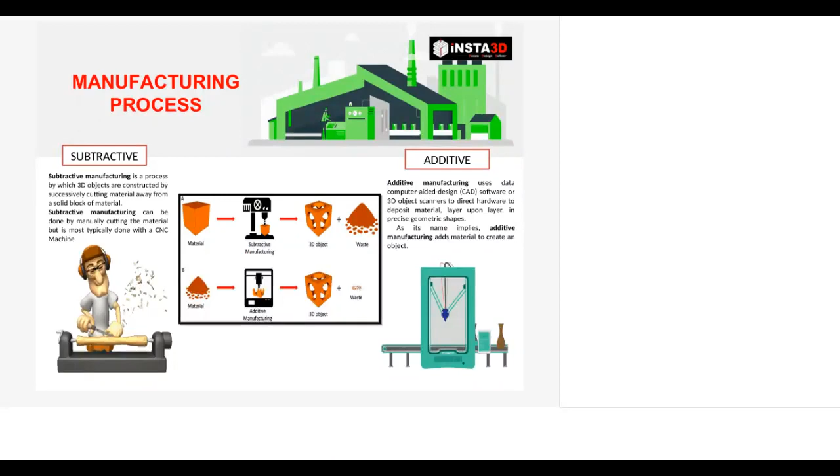So can you go to the next slide, Joseph? I have completed all this. Next.

11% of manufacturers believe 3D printing is ready to produce end-use products, meaning functional products. Most agree that 3D printing represents a more sustainable concept than conventional processes. Additive manufacturing uses raw materials which are biocompatible and biodegradable. So it is very sustainable to nature as well as in its processing technologies.

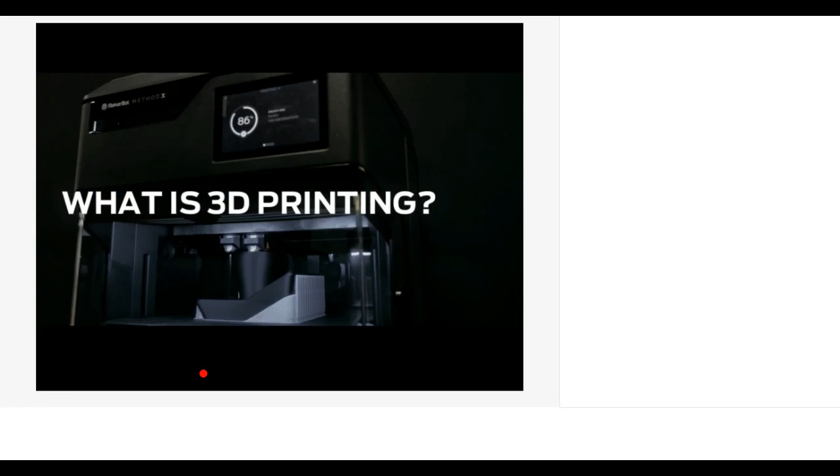So as you all know, what is 3D printing? It is like... next slide. Next slide. Next.

This is actually the process involved in 3D printing technology, additive manufacturing. Any technology can classify 3D printing into different categories based on its processing technology, but the process flow is same for all. You will be having an idea - the first stage of the 3D printing process is ideation, or creating an idea.

Next, you have to take that problem into a conceptual design or a model. For that, you can use CAD modeling software, or go with a scanning process. By this process, you get an output as a 3D model.

This 3D model is then transferred to slicing software, which slices the model into n number of layers and converts each layer into machine language - G codes and M codes. This machine language is uploaded to a 3D printer. Before uploading, simultaneously we upload the raw material. If you go with FDM, fused deposition modeling or FFF printers, we use spools or filament. If you go with SLA, stereolithography apparatus, we use resin, a liquid-based raw material. If you go with SLS, we use powder-based raw materials.

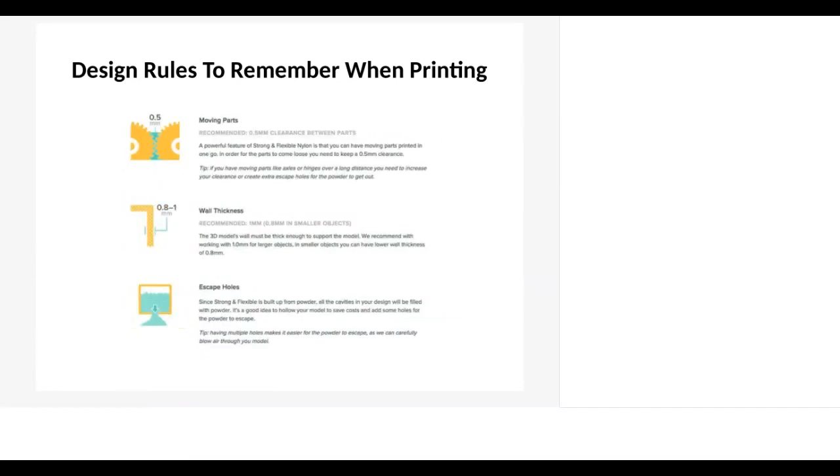Next. So you can come to next slide. Next slide. Next slide. Next. Next.

Yes. So the basic 3D printing technologies we can classify into four, actually. The first one is SLA. SLA means stereolithography apparatus. It is the first of its kind, discovered by Charles Hull, and he used photoresins which cure on passing a laser over them.

So here there will be a tank, a resin tank. There will be a plate, and a laser source will be there. When the laser source passes through the resin in the tank, it solidifies. Where the laser touches the resin, it solidifies, and it builds the object on the build plate. So here we normally use photoresins based on their intensity of curing.

We use laser sources. And there are a lot of categories of raw materials. We can use castable resins, wax kind of resins, dental resins, flexible and hard resins. There are a lot of variants of SLA resins. And the benefit of this machine is we get a good surface finish, and we can opt for higher layer resolution in SLA technology.

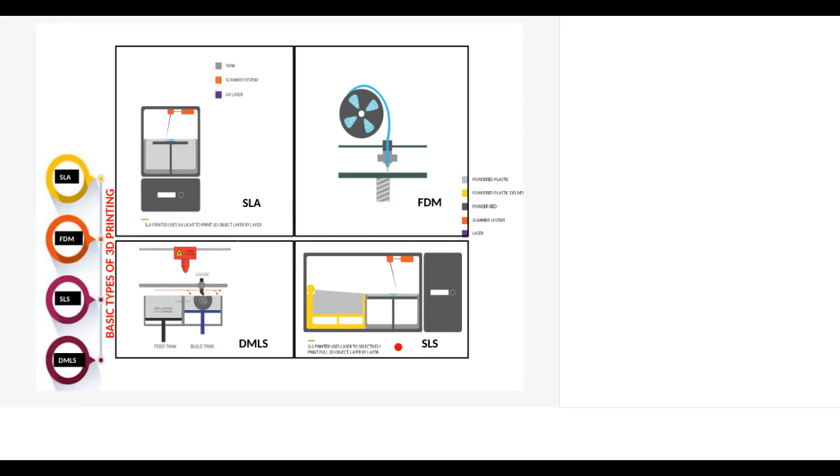So the benefit here is we do not require support material or support structures compared to FDM or SLA technology, since DMLS is already printing in a powder base. And the next one is SLS technology. In SLS technology, we use a thermoplastic material, and it also cures with a laser. When the laser passes over the thermoplastic powder, it solidifies. So these are the four major categories of 3D printing basically available in the market.

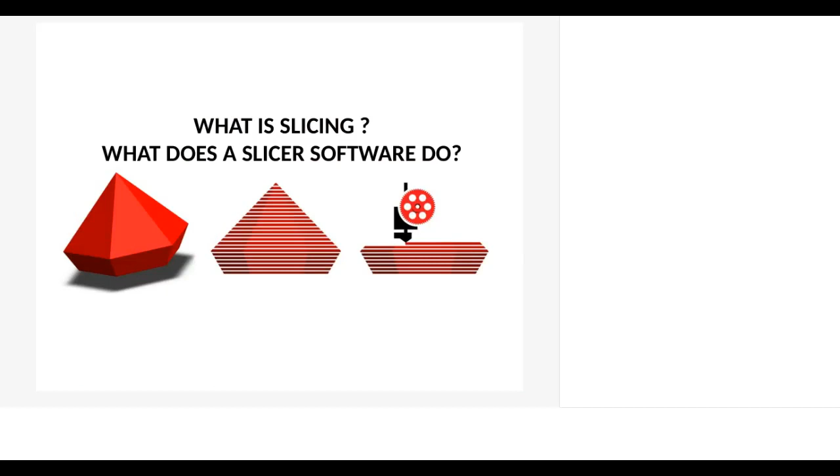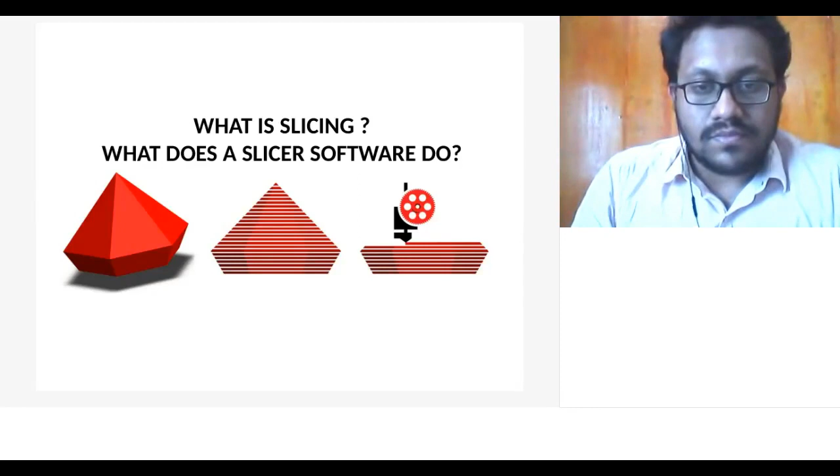Sir, Joseph, sir. Yes, sir. So I will start, sir. Okay. I'll present your PPT, sir. Okay, I will share, or you will be loading? You will share, sir. Okay, fine. Let me know if any disconnection happens, sir. I am not getting the share screen option, sir. Wait, sir. Hello, the file is converting, so please wait for 2 minutes, sir. Okay, sir.

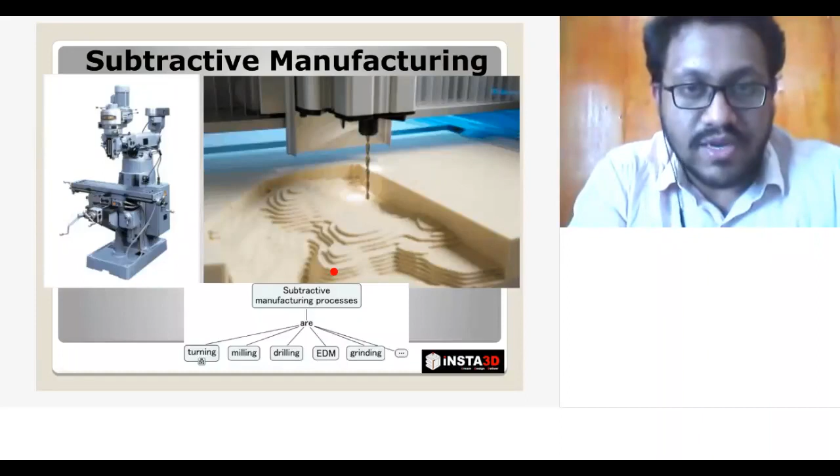So subtractive manufacturing is of many different types, like turning, milling, drilling, EDM, grinding, CNC machines. Everything comes under subtractive manufacturing, where a raw material is converted into a product by removal of material, and it involves loss and wastage of material. Whereas additive manufacturing is totally different, where the waste is very minimal. So there are more advantages compared to conventional subtractive manufacturing.

There are a few process parameters which influence subtractive manufacturing. Preferably in all the processes, there will be feed, speed, tool orientation, cut direction, coolant, depth of cut, tool geometry, etc. So before going deep into additive manufacturing, let's see what additive manufacturing is.

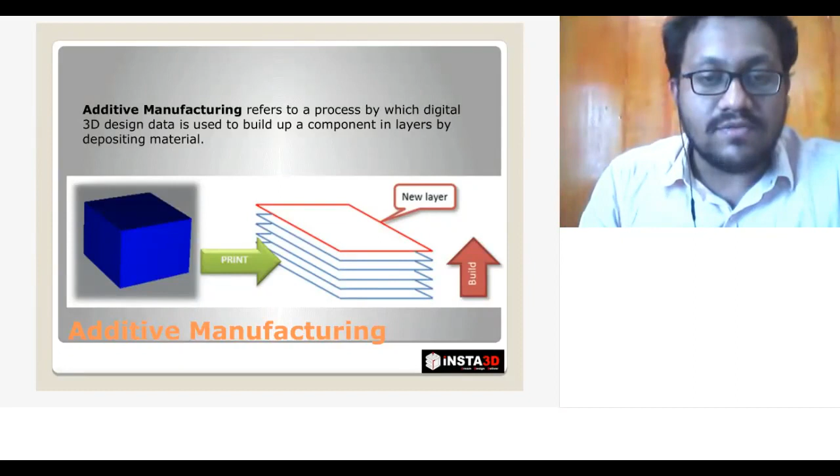This refers to a process by which design data obtained from CAD software is used to produce a component or end product by depositing layer by layer over one another. Hence the final product is received from the 3D printer or additive manufacturing machine. This is the main difference between conventional subtractive and additive manufacturing: in subtractive the scrap or waste is very high, but in additive manufacturing the scrap or waste is very, very less.

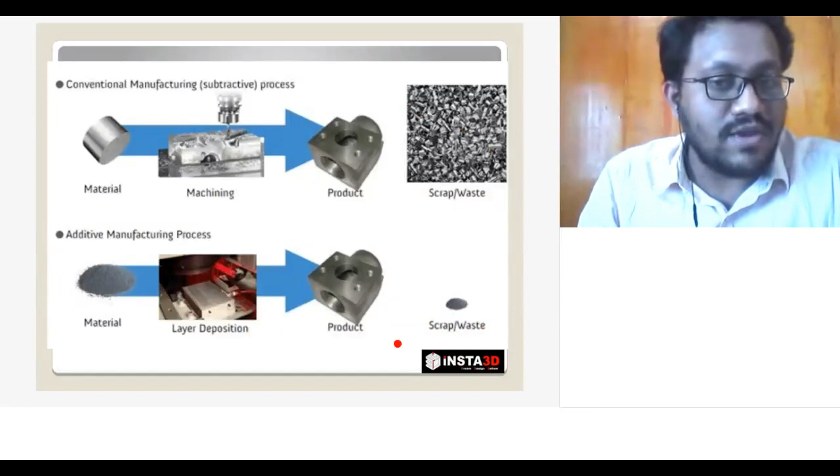So in technical terms, 3D printing is also called rapid prototyping, which is the automatic construction of physical objects using additive manufacturing technology. So material is added layer by layer in order to get the final component. That's the basic principle of rapid prototyping or the additive manufacturing method.

These are the other terms used to represent rapid prototyping: solid freeform fabrication, automated freeform fabrication. These are other terms involved in representing 3D printing or the rapid prototyping technique.

So there are many types of 3D printing techniques. Hope you have a good knowledge of the different 3D printing technologies. I'm not going deep into the 3D printing technologies available, but I will be speaking about their characteristics. These characteristics involve various process parameters, capabilities, or versatility of the technology to give us different 3D printing experiences. The types of 3D printing differ based on building mechanism, price points, materials, and the applications where they are used.

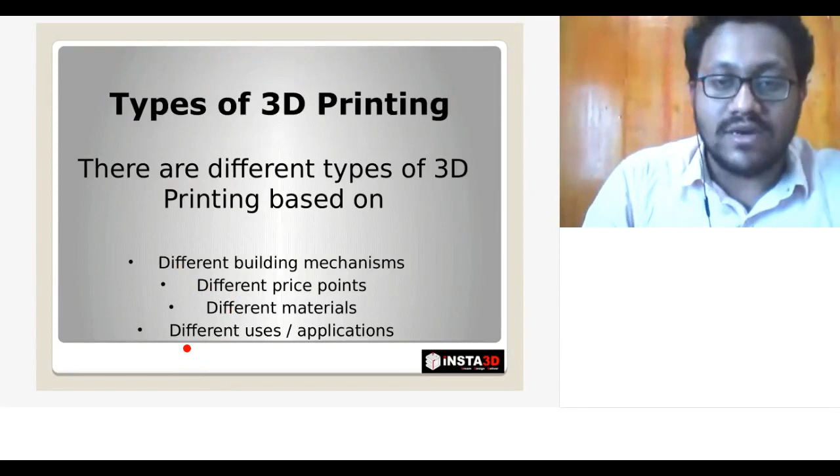So hope you can see it. These are the different 3D printing technologies available. First one is FDM, then SLA, DLP, SLS, material jetting DOD, binder jetting, and DMLS, the metal printing section. So let's see the characteristics one by one.

As you know, FDM is a technique where solid material in filament form is fed into the extrusion head, where it gets into the molten state, and it is laid layer by layer onto the build platform. So the final product is obtained. This dark blue color is the real build material, the part being printed, and the light blue color is the support material, which supports the overhanging structures so they don't collapse onto the platform.

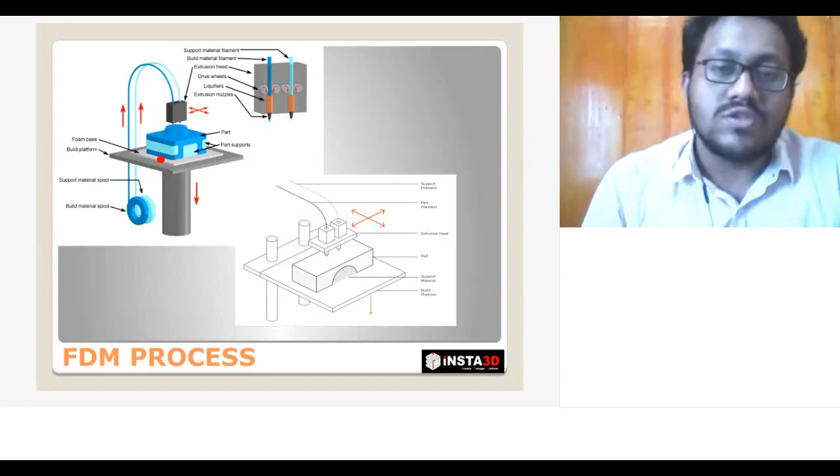These support structures are of two types basically. One is breakaway support structures, and the other one is water soluble support structures. This depends on the type of machine we are using. Mostly all will be using breakaway support structures. So this is the FDM technology.

Regarding the characteristics of FDM, there are various process parameters which we will be discussing in the slicing software. These are some of the main process parameters: layer height, infill ratio, shells, and infill pattern. I will be explaining them in the slicing software section. These are the basic parameters we can change as per the requirement or the application of the 3D printing.

The errors happening in FDM technology are of two types: the warping effect, and improper layer adhesion in the 3D printed model. So what is the warping effect? It is related to the adhesion between the build platform and the first layer. If it's not good, the material tends to bend upward. So if warping occurs, the printed corners or edges will be slightly warped, and this is due to inconsistent extrusion or inconsistent cooling of material.

So if you are building a big component, say a 500 mm by 500 mm component, which is around half a meter, the material needs to cool instantly once it is laid. The printer head moves from here to the end of the 3D printer, and it will take about 4 hours to finish the first layer. In that 4 hours, the cooling of material will be partially inconsistent.

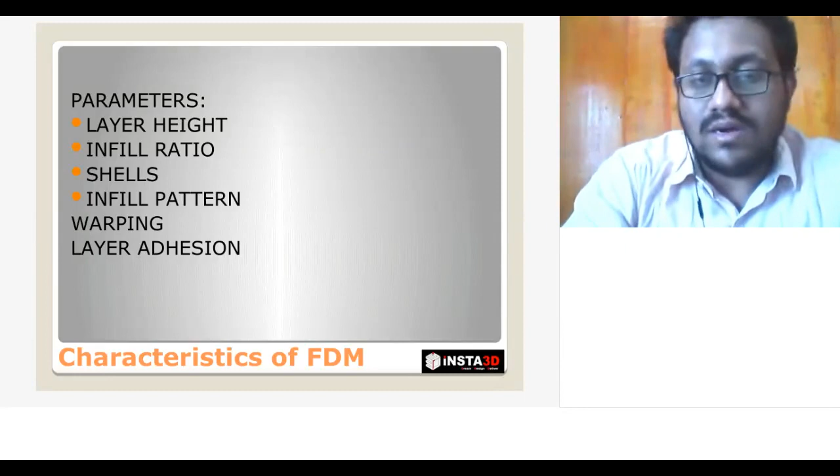So next one is the SLA or DLP method. SLA uses a laser as its light source, and DLP uses a projector as its light source. As you see, in the SLA technique, there will be a laser pointing at the 3D printing platform, and this is the resin material. Both use resin as the raw material. It's in liquid form.

So when the light focuses on the resin, it is photosensitive in nature, so it gets cured right away when the light is falling on the resin. In SLA, the laser point focuses onto the resin, and in DLP, the whole first layer or the second layer is focused at a time by the DLP projector.

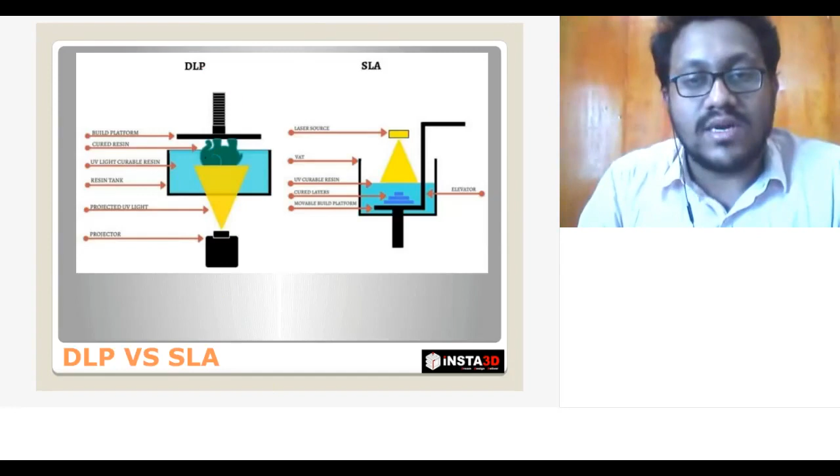So comparing the time taken between SLA and DLP printers, SLA is a bit slow, and it depends on the machine which is used. In higher industrial grade machines, it's obviously fast, and in normal basic commercial machines, when comparing DLP with SLA, the curing time is a bit faster in the DLP method, whereas the finish and other things are very good in the SLA technique. So this is the basic difference between SLA and DLP method.

There is another type of 3D printer in SLA, which is called the SLA LCD 3D printer, which is the new version of it. In this, an LCD screen is placed and a UV LED light is passed through, and you can even use your phone to 3D print nowadays. There are many small 3D printers available in the market, where we can just keep the platform or resin tank over your smartphone and then start the 3D print.

So in case of characteristics of SLA 3D printers, mostly all the printer parameters are fixed by the manufacturer. Only the layer height and the support details or the build size vary, which can be provided by the 3D printing users. And similar to the FDM warping effect, there is an effect called curling, which happens in the SLA technique. You can ask, why does an SLA 3D printed part curl or warp?

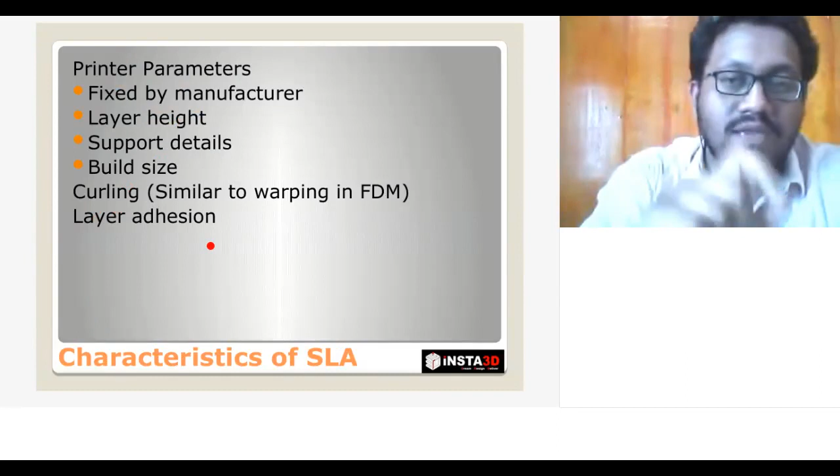So this is the SLS technology, where we use powder and a laser as its heating element. So this laser heats or melts the plastic powder, thermoplastic powder. Basically, they use nylon ABS powder. Even certain other powders are also used in the SLS technique, where this laser melts the powder and combines or joins the powders into a cross section as per the requirement of the part.

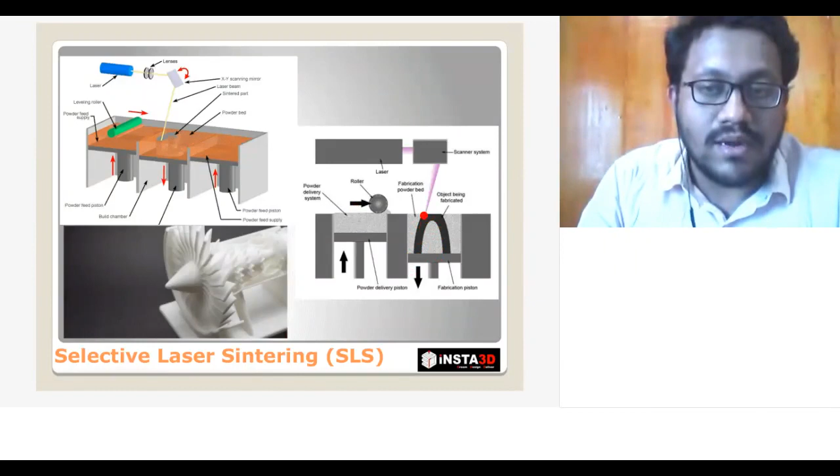So in this case, the supports are not required. The part support structure, the powder acts as a self support, so that there is no problem in the overhangs. So as I said, the characteristics is like no support structure is required. Layer height can be adjusted by the user.

Layer adhesion is a bit minimal when compared to SLA technique. It's because of the porous nature of the 3D printed component. Since we use powders, the powders when sticking, there will be a small gap in between the molecules of powders. So the porous nature makes it look a bit rough or matte finished. So we can just dye it, or we can use any other post-processing technique in order to improve the quality of the 3D printed component.

So here also there is a problem called shrinkage and warping effect, and it's similar to the things which were discussed in FDM and SLA techniques. And there is a case of over-sintering which is happening in SLS technology. This over-sintering is like high heating of raw material.

So once the laser is focused onto a raw material, if we have say 1 mm wall thickness and there is a 1 mm dia hole in the cross section, the 1 mm hole gets over-sintered and there will be no hole visible when we get the 3D printed output. It is because of over-sintering. So we need to increase the wall thickness, or we need to control the laser parameters accordingly so that you can get a full good 3D printed component out of the SLS 3D printer.

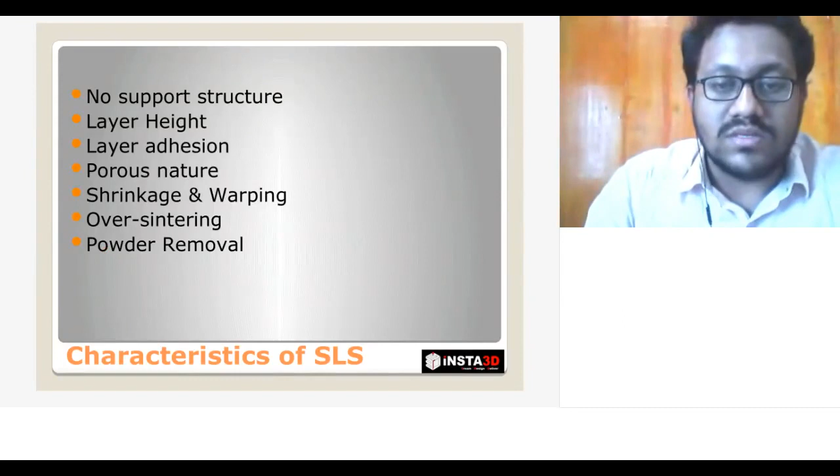So next is the material jetting technique. Here a nozzle is used. It is similar to a normal 2D printer. Here the nozzle supplies the material and a UV light cures the raw material which is laid onto the platform. There is a nozzle supplying the raw material and the support material as well. And there is a UV light which is behind the nozzle, so that as the nozzle supplies the raw material, this UV cures the raw material so that layer adhesion happens and the final product is formed.

So when speaking about the characteristics of material jetting technique, it can handle multiple materials. The most favorite material jetting technology used is the PolyJet technology of Stratasys, where multiple materials can be used. For example, the materials used in PolyJet technique are of two types. One is the Vero material and the other one is the Tango material. Vero is slightly hard in nature and Tango is elastic, flexible in nature.

So combining these two proportions, like if you are using 100% Vero material, the total component will be very hard. You can even change the shore hardness values of the material, so that by inputting the shore hardness value, the slicing software itself automatically balances the amount of Vero and Tango. If we need a slightly flexible part, we'll be reducing the Vero material and increasing the Tango material so that you can get a flexible part.

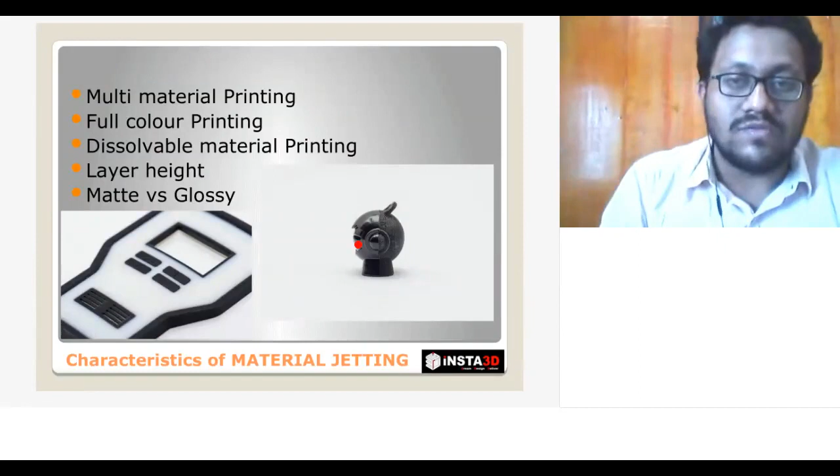So the matte finish is the output. In glossy finish, only where support is required, there the support occurs. In matte finish, the total part, regardless of any orientation or overhanging angle, is engulfed in the support structures. So the finish differs when we choose matte or glossy. It is available in the software whether we should go for matte or glossy finishes.

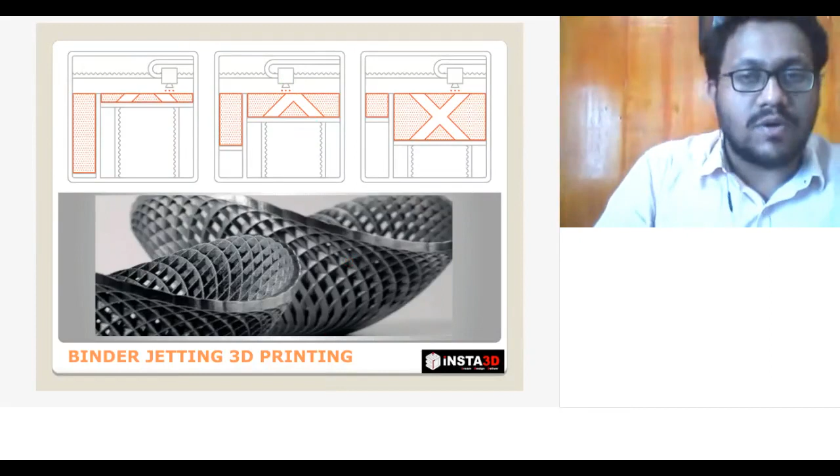Next is the binder jetting technique. This is similar to the SLS technique, where it also uses powder. The feeder rolls the powder onto the platform, and a binder can be used in the nozzle in order to combine the powder. Binder jetting is a popular technique where large 3D prints can be formed easily.

Something like sand casting cores and molds can be produced using binder jetting technique. Full color printing is possible using binder jetting because when supplying the binder, you can also add color to it, and there is no support required since it uses powder. So it acts as a self support, and the layer height, adhesion, and mechanical properties are a bit low in case of binder jetting technologies.

So we go for post-processing techniques like infiltration and sintering. We infiltrate it with other metallic components, brass can be infiltrated into it, so the part gets mechanically stable. You can also sinter it for a long time so that you get a good, hard 3D printed plastic out of it.

Instead of going for a metal printer, there are printers available in binder jetting using metal raw material. In this case, you can get a component at a fraction of the cost of a metal printer. So metal printing is also possible in binder jetting technology, but the mechanical characteristics will be very low compared to other processes.

This is metal printing, and it is highly recyclable. It has good dimensional accuracy. Layer height can be varied. Hollow sections and lightweight structures can also be produced using metal printing. We only need to post-process it after 3D printing so that you get a good surface finished metal printed component.

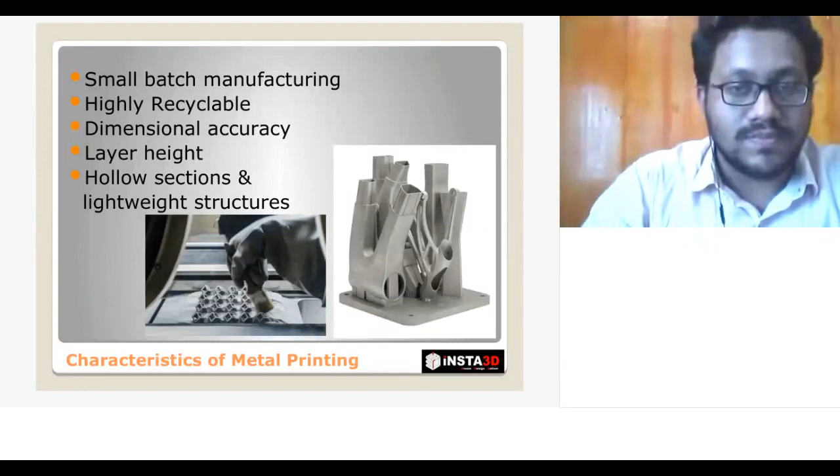So we have seen the characteristics of different 3D printing technologies. Hope you got a glimpse of every technology used and its few characteristics.

Now let's move into the slicing software of FDM and FFF technology. FDM is called Fused Deposition Modeling. The other commercial name is FFF, Fused Filament Fabrication.

Fused Filament Fabrication, FFF. What are the filaments currently under research? There are many 3D printing thermoplastic filaments available in the market, called PLA, ABS, ABS carbon fiber, PLA carbon fiber, PETG, ASA which is an acrylic material, nylon, PC, and other materials. Everything is available in the market. There are also a few 3D printing filaments coming into the market which are a blend of these filament materials.

There are also metal filaments available in the market right now. Stainless steel along with PLA material is being mixed and provided as raw material, so we can print stainless steel using an FDM 3D printer very easily. Then you need to post-process it using several techniques so that you can get a good surface finish. There are many researches being conducted in this area.

Getting into the FDM or FFF technique, these are the different parameters which can be adjusted in a slicing software: layer thickness, shell overlap, infill density, its pattern, raster width, infill angle, top and bottom layers and its pattern, printing speed, print temperature, build orientation, air gap, nozzle diameter. There are so many process parameters in FDM.

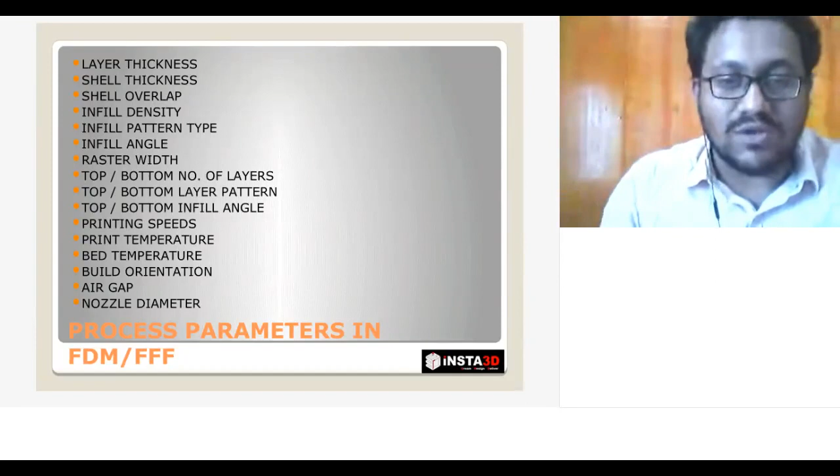So what are the characteristics that can be studied in a FFF or FDM 3D printed part? You can study the dimensional accuracy of the part, surface roughness, mechanical properties or tensile strength, compressive strength, flexural yield strength, impact, elastic performance, and hardness of the 3D printed part obtained from FFF or FDM technology. You can research these characteristics so that you can compare which material is apt for which application.

Moving on to slicing, as Mohammed Bashir said, it's a program which converts 3D digital models into printing instructions, called G codes and M codes, similar to the CNC method.

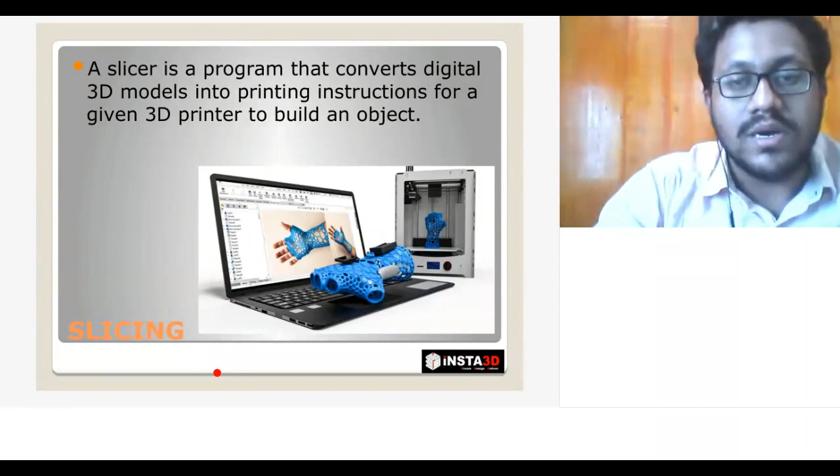This slicing software, when input with a 3D printing design, converts the STL file or digital data into a G code, where we input the G code into the 3D printer to build or manufacture the final component.

There are many slicing softwares available. One popular one is Idea Maker, which prepares 3D models for 3D printing and turns them into a G code file for the 3D printer. You can also add custom 3D printers into this software.

This is an open source software supported by Raise 3D. We can download Idea Maker using this link. Hope you have received the link, you can just download it. If you are a Mac user or Windows user, there are many versions available, and even the basic versions are available in the same link.

Next, I'll go through all the options available in the slicing software so you can get a good glimpse of what's available. When I share my screen along with the Idea Maker software, you can view it live regarding the options, so you can easily understand when I'm teaching you live.

First, we need to import the design file into the slicing software. There's a plus symbol or an import symbol where we can import STL, OBJ, and VRML files. We cannot import a SolidWorks file, a Pro-E CATIA file, or an Autodesk file directly into the software; you can only import it as a mesh file, STL or OBJ.

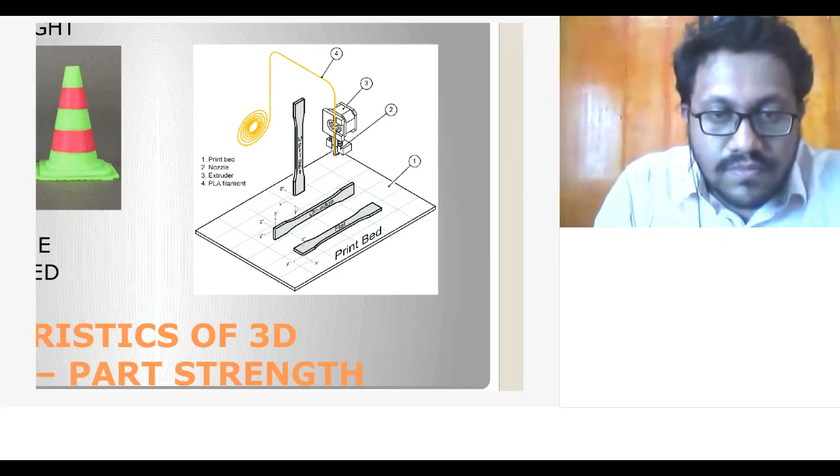And the third is minimum Z height. This is a tensile strength specimen according to the ASTM standard. As you see, it's an FDM 3D printer where the filament is getting loaded, and there are three orientations shown here: one is the flat orientation, the second is the on-edge orientation, and the third is upright position. So which one follows the 3 points? It should have large surface area on the platform, minimal support, and minimum Z height.

When you see the upright position, the Z height is very high. In the case of flat orientation, the Z height is very low. In terms of support, these two orientations get support material, support structures, because of their overhanging capability. In the flat side, you don't need any support to 3D print. And in terms of large surface area on the platform, the flat orientation is the best technique, where it satisfies all three characteristics to get a good part strength.

So when placing a component in a 3D printer, you need to take care of the build orientation, which side you are placing it. This build orientation depends on various parameters. Like if you are going for a good highly finished component, there are instances where we need to sacrifice the finish of the component. So we need to choose based on which application we are using.

In case of this VLC player 3D printed model, there are two orientations available. If you need good part strength, you need to go with this one, because the Z height is minimal, which improves the part strength. And if you need an aesthetic look, you need to go with the right one. So these are the two orientations possible in this.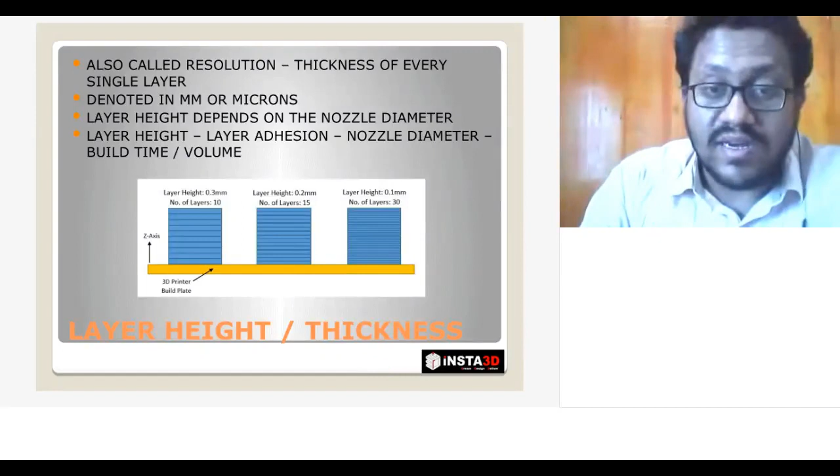As you see in the representation here, with a 0.3 mm layer height, in order to manufacture a 3 mm component, the number of layers involved is 10. Each layer takes around 1 second, so in 10 seconds it's over. But with a layer height of 0.2 mm, the number of layers is 15, and 15 seconds is taken to build the same part. And with a layer height of 0.1, 30 seconds is required to build this part. So it depends on the number of layers and the layer height, the part time, build time.

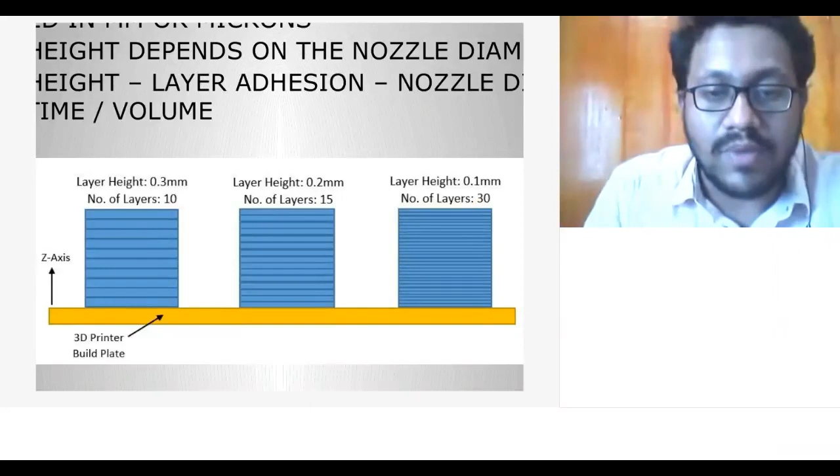So this is the first window where you can input the layer height, 0.3 mm, which is inputted here. You can also change the first layer height. There are other options as well, which we will be discussing now.

Next one is the shell. Shell refers to the thickness of the model's wall. So this shell is the outer perimeter to the 3D printing model. So in this, you can see there are two shells which is available here, and here it is of 5 shells, here it's 10, and here it's 15. You can see the thickness variation in each photo.

So increasing the number of shells can increase the part strength, but it can also increase the build time as well. So in case we are using 2 shells, there is an option called shell overlap, which determines the adhesion or bonding between the shells. So in case of these 2 shells, imagine we are drawing something. You will be giving the outline first and then filling it with the shade. You will shade the fill inside.

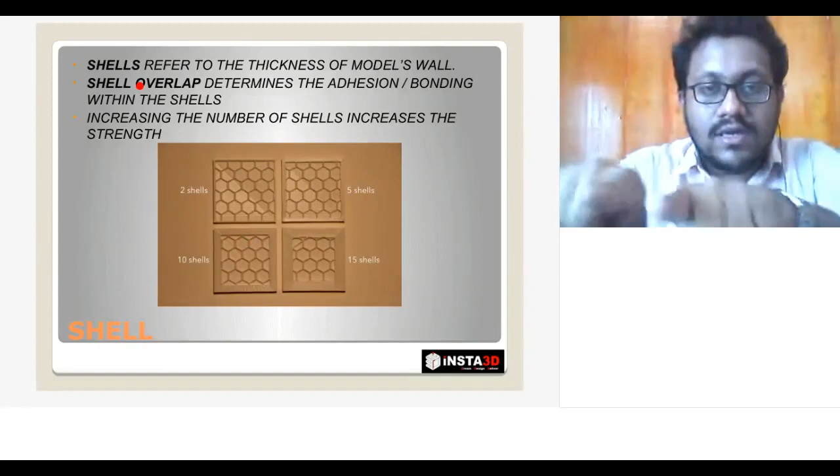So the 3D printer also works similarly. First the first shell is being laid and then the second shell is laid. And if you give a shell overlap percentage as 15 or 50%, the first shell will be like this and the second shell will be overlapped according to the percentage which is provided in the slicing software. So it can increase the strength.

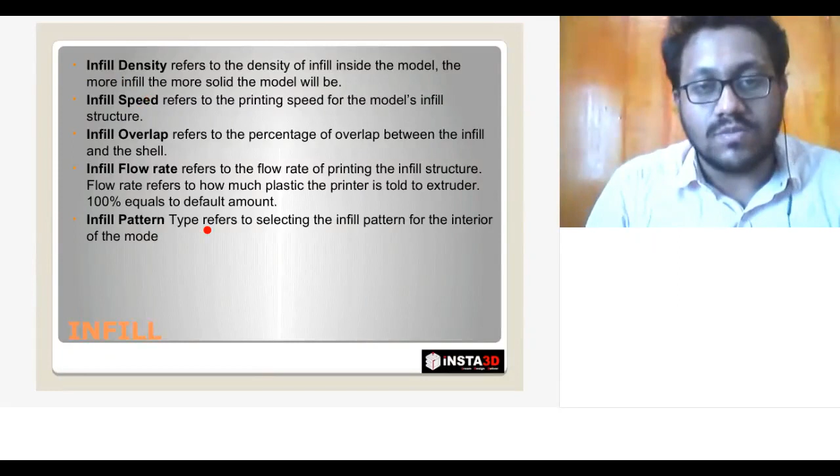So after giving the shell in the first tab, you can also vary the infill quantity. The infill density represents the amount of material inside the model. So you can have a completely solid model or a 0% infill model as well. You can also have a surface model as well in a 3D printer. So this is the tab where the infill can be provided. The infill percentage can be provided in the tab, and there are different infill patterns available, which is explained in the coming slides.

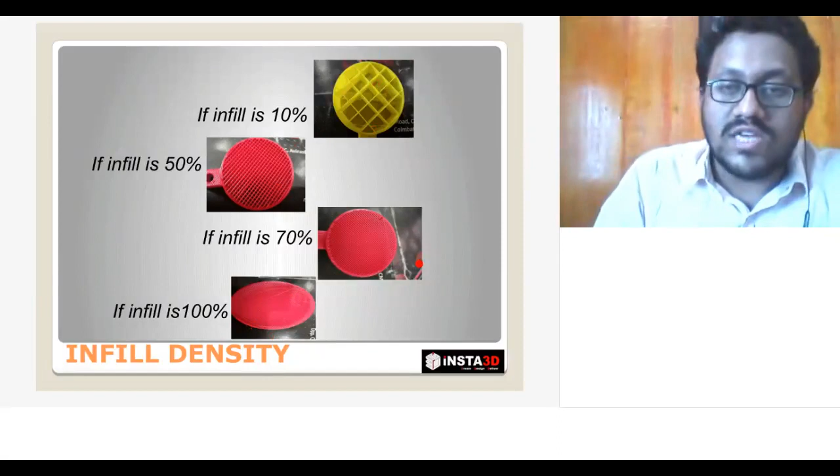So if you give infill as 10%, the product looks like this. So less amount of material is being used inside, whereas the outer shells are intact, and it's used for prototyping purpose. If it's used for prototyping purpose, we can use up to 50% infill. And if you're using it for a working end product or functional product, you can go for 70% or 100% fill. So changing the infill density also increases the time taken to 3D print the component.

So these are the different patterns which are available in the 3D printing slicing software. One is the grid, rectilinear, honeycomb, triangle, cubic, concentric, gyroid, lines. So these are the 8 different types of infill pattern which are available. So based on the application, we can change the infill pattern types. If you need a good strong part, you can go for gyroid or honeycomb structure so that you can get a good part strength.

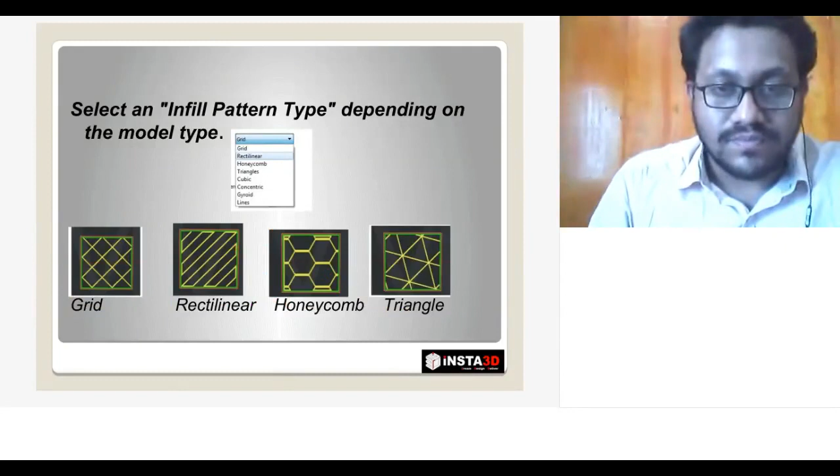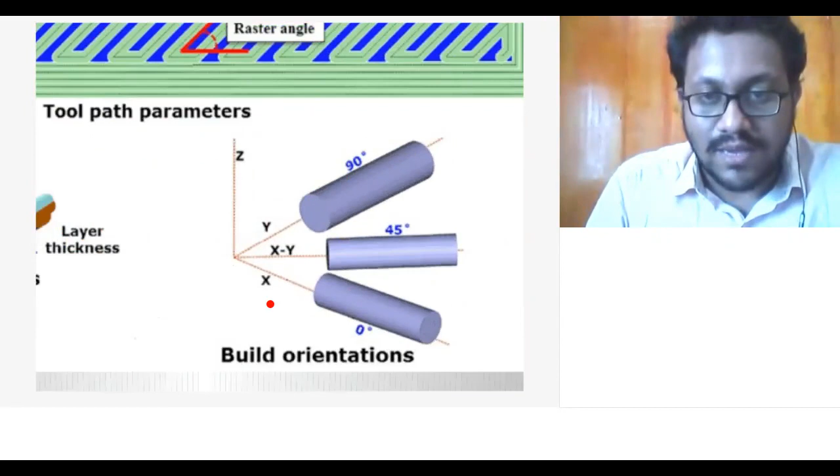So this picture depicts the different build orientations which can be kept and how the layer thickness influences the layer adhesion. So the brown one is the first layer and the blue one is the second layer, where it imprints onto the first layer, it adheres over the first layer. So there is a good bonding between layers happening.

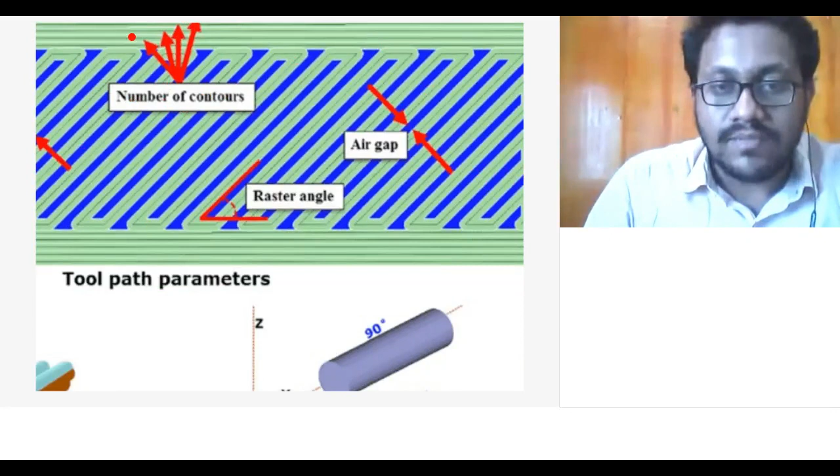And this is a 3D printed cross section of a part. So the outside shells are called contours. Its other name is contour shell or contour. And for infill, the other word is raster. So you can also vary the infill angle and the infill width as well. So there are instances where we can control the air gap as well.

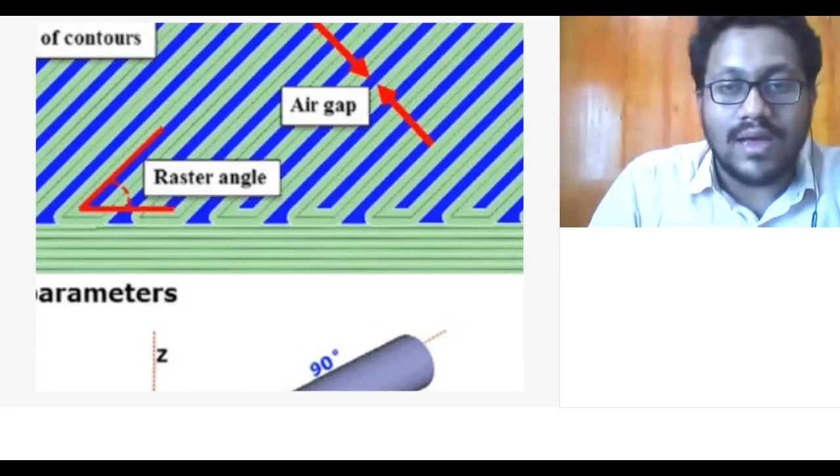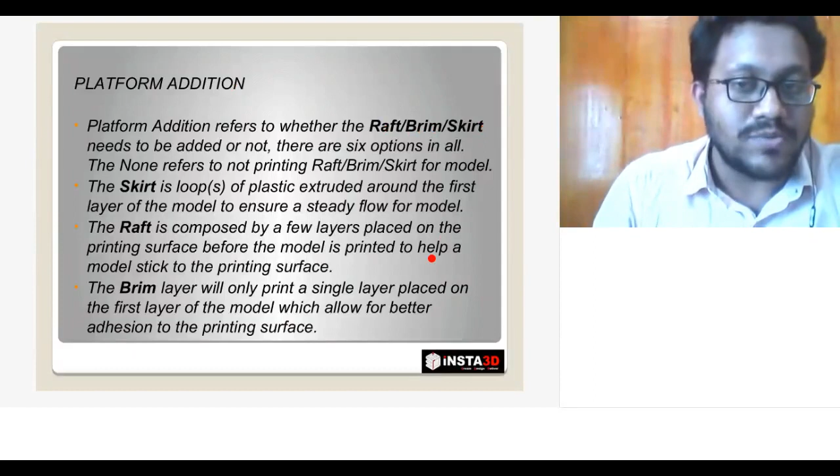So next is the platform addition. I said there is an effect called warping effect happening in 3D print, where the 3D print bends in an upright manner. In order to reduce the warping effect, there are different platform additions available: the raft, brim, and skirt options. So this is the tab where the raft, brim, and skirt can be added. So this is called the raft, and the raft line type can also be varied. Lines, rectilinear, everything is available.

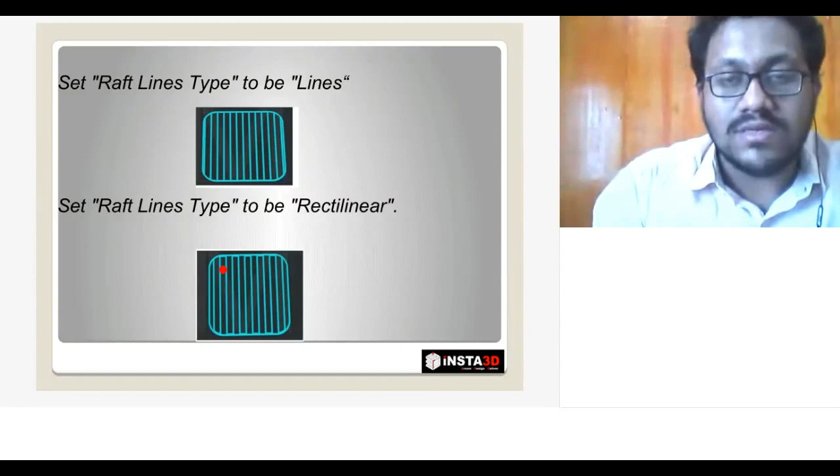If raft is given, this is something like a raft. Hope it's visible. So the 3D printed component can be separated right away from the raft, so that there is no warping effect occurring in the 3D printed component. So this is a temporary base which is printed first, and then the 3D printed component prints over the raft in order to minimize the warping effect. Or if you are printing a small cross-section component, you can use raft in order to avoid the toppling of 3D prints.

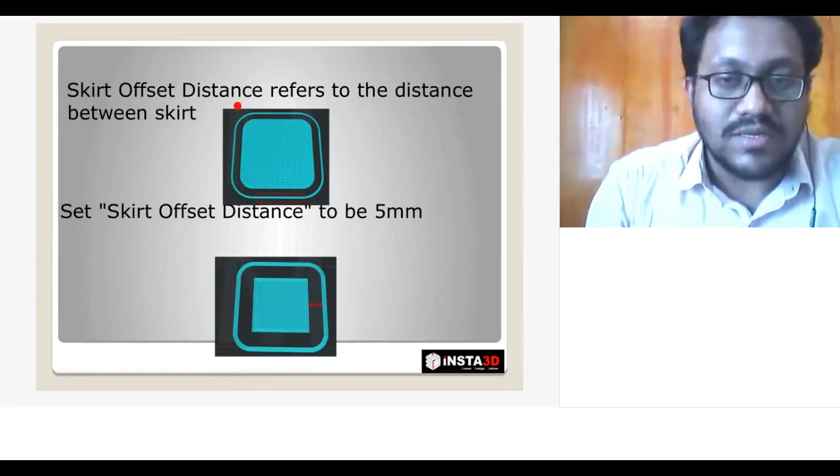The next one is the skirt. In order to get a neat 3D printed component, there will be material deposited outside of the 3D printed model, so that it ensures that enough material is given inside the 3D printing component. So this just happens in the first layer of the 3D printing. So brim is something like an extra support to the raft or the 3D printing component. It consists of different lines where it presses onto the 3D printing component so that warping can be minimized.

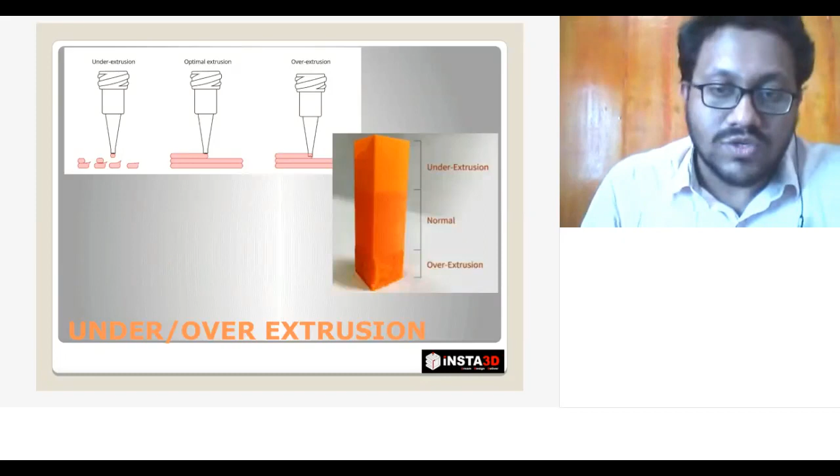And the print and bed temperature can also be varied in the slicing software. Different materials have different print and bed temperatures. So in terms of temperature, there are two kinds of errors which can happen. One is under extrusion, the other one is over extrusion. As the name represents, this is called under extrusion and this is called over extrusion.

If the temperature of the 3D printing material exceeds the melting point or the exact temperature of the filament, over extrusion can happen. So this will be in a rugged manner. It will not be a good surface finished component. Whereas if the 3D printing nozzle doesn't attain the melting point of the filament, under extrusion can happen, where improper layer adhesion also happens. So we need to find the exact 3D printing temperature in order to get a normal 3D printed component.

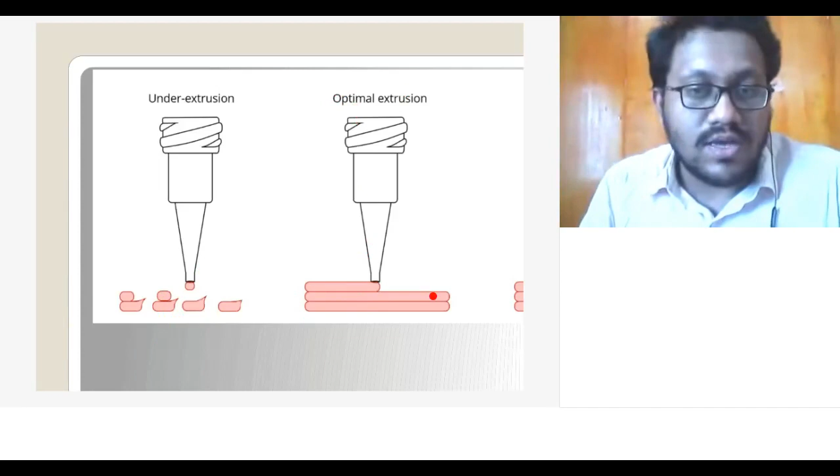So in under extrusion, as the nozzle deposits the material, improper extrusion is happening because it hasn't reached the melting point of the material. So improper extrusion happens and layer adhesion is reduced, as well as there will be gaps in the 3D printed component, so the finish of the part will not be good. And in case of normal or optimal extrusion, the extrusion is perfect, the layer adhesion is good, and there are no gaps in the 3D printed component.

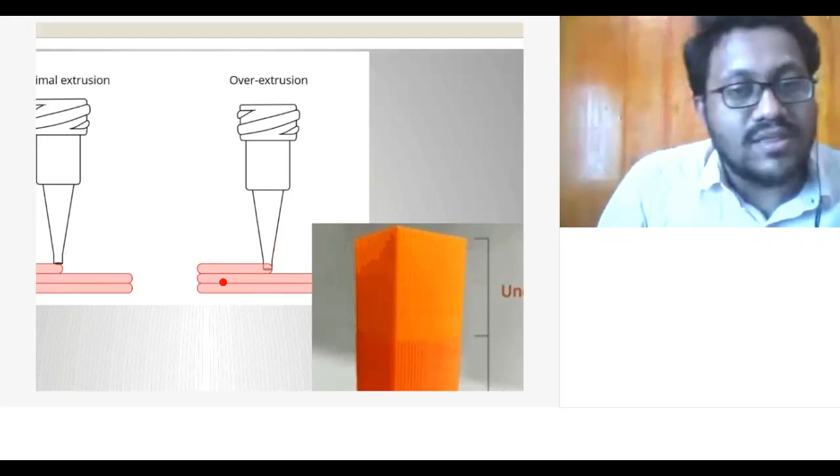In case of over extrusion, if we overheat something, there will be bubbles forming, or it can expand. So in this case, the material flows too much outside the nozzle, so the layer adhesion will be good, but the layer finish will be very minimal.

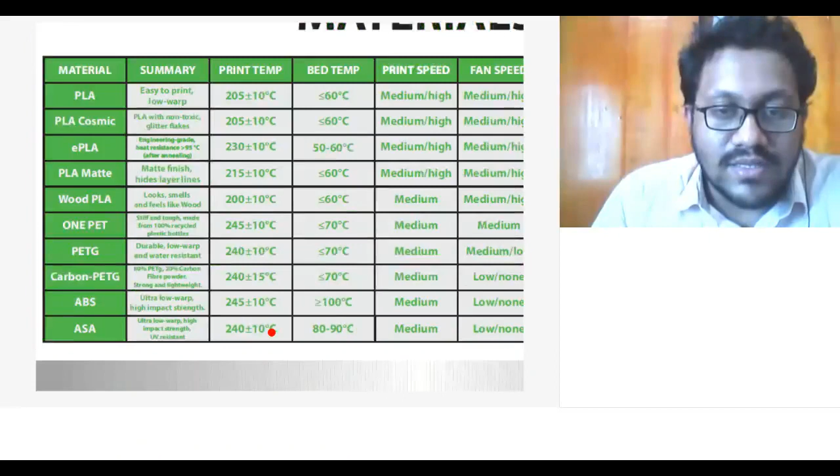So these are the different materials used in an FDM 3D printer: PLA, PETG, nylon, ABS, ASA, PC, Ultem materials. Each one has a different glass transition temperature and melting temperature. In case of PLA, the print temperature is around 205 degrees. In case of ABS, it's around 245 degrees. And we need bed temperature for almost all the materials. In case of PLA, there is no bed temperature required. But in some materials, there is a possibility of giving a bed temperature.

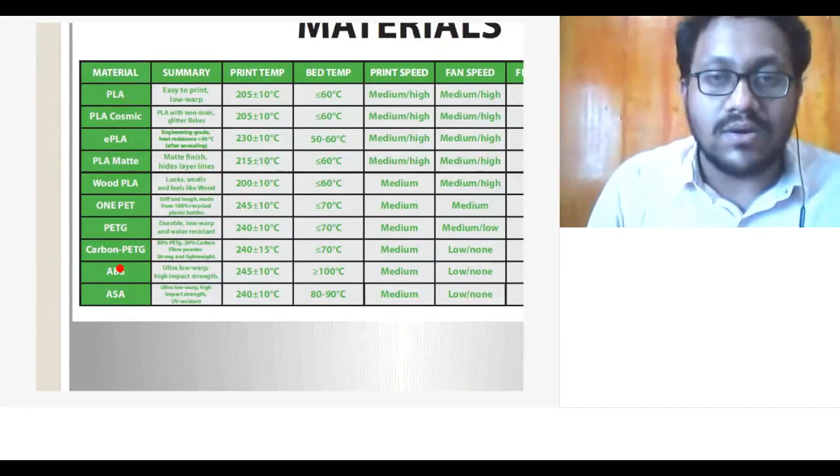And each material has its own printing characteristic. Some are easily printable and some are difficult to print. When comparing PLA with ABS, ABS is a bit difficult to print, and there will be a foul odor coming out when printing ABS. So we'll be using good exhaust techniques, and we should print it in an enclosed chamber to get a good surface finished 3D printed component out of ABS material.

So as I said, another 3D printing parameter is the top and bottom layer infill angle. We discussed the shell and the infill nature of the 3D printed component. There is something called top and bottom layer infill, where if we give 10% infill to a component, the shells are formed and less material is deposited into the component, whereas the bottom and top layers should not be left open. So we need to solid fill the top and bottom layers, and this can be controlled using the slicing software, where you can provide the number of top and bottom layers required for the printed component.

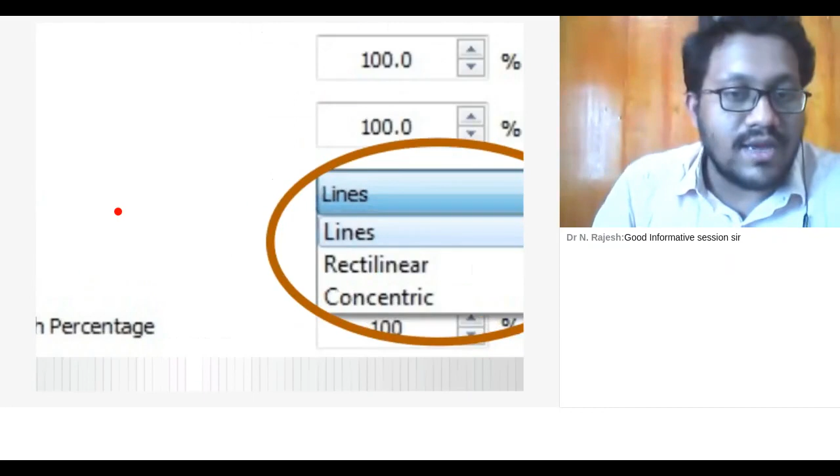So this also has different pattern types available. Lines, rectilinear and concentric pattern types are available for the top and bottom layer patterns.

Print speed can also be varied in the slicing software, where optimum print speed is 80 mm per second or 60 mm per second. It depends on the material being used. PLA can print up to 100 mm per second. ABS can be printed at 80 or 60 mm per second, whereas PETG and other flexible materials should be fed at a rate of 50 or 30 mm per second to get a good surface finished component.

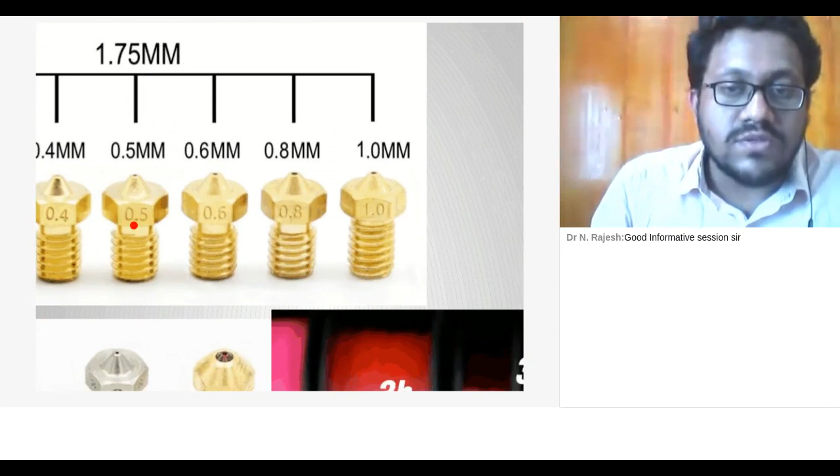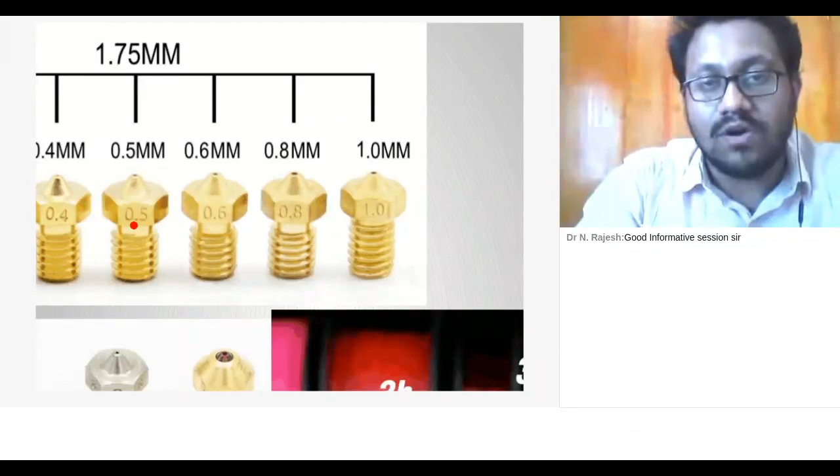So these are the nozzles we are discussing. They are of different types. We use two kinds of FDM 3D printer. One is an FDM 3D printer which uses 3 mm raw material. 3 mm is the diameter of the raw material used, and the other one is the 1.75 mm raw material 3D printer. In the 1.75 mm raw material 3D printer, nozzle sizes from 0.2 to 1 mm are available.

And there are different materials which are also used: brass, steel, hardened steel nozzle, ruby nozzle can also be used. These different kinds of material are used to handle different kinds of printing materials. If you use a carbon fiber filled thermoplastic, you need to use a hardened steel nozzle so as to reduce the wear of the printing nozzle.

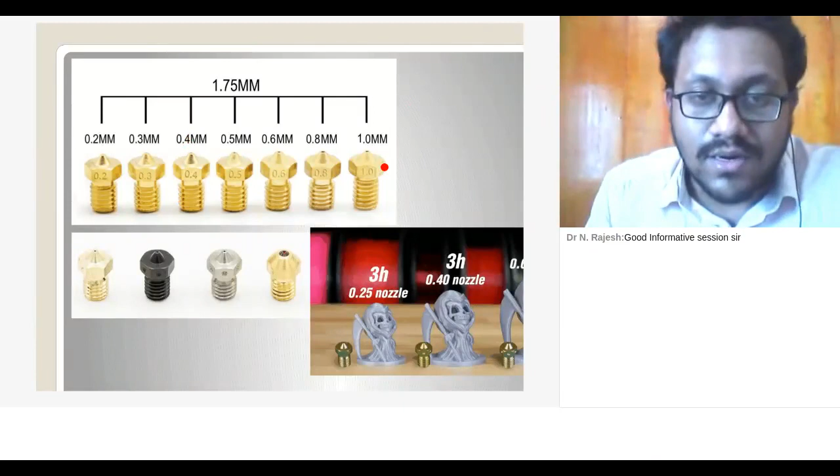So if you are using a brass nozzle for a carbon fiber filament, say, for example, a 0.4 mm brass nozzle, once we start using the carbon fiber filament, after a few prints or 2 days of time, the nozzle gets worn and it gets converted into a 1 mm nozzle. So there is a lot of wear happening in a brass 3D printer nozzle.

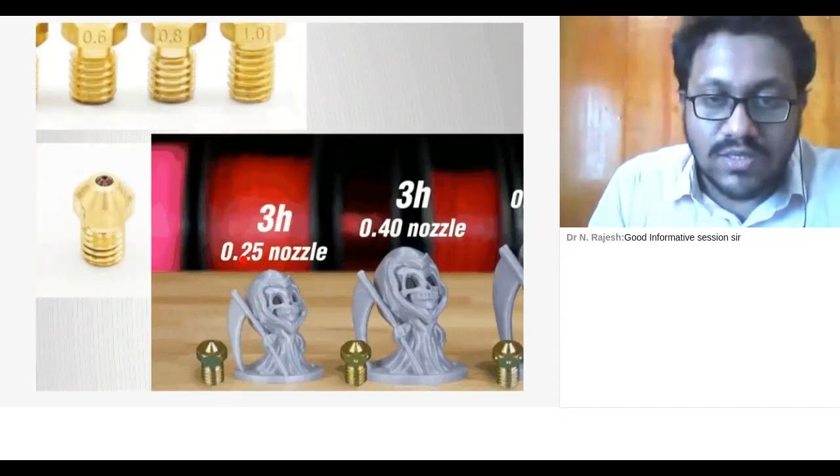So by changing the nozzle, you can also vary the layer height as well, and the time taken also depends on the nozzle size. In this case, when using a 0.25 mm nozzle, this is printed in 3 hours. Whereas the same thing when printed with a 0.4 mm nozzle with a good extended height, you can print the same thing in 3 hours.

And in case of a 0.6 mm nozzle, you can print a larger structure than the 0.4 mm nozzle in the same 3 hours. So the time taken reduces as we change the nozzle for a single same component, and it's all dependent on the nozzle size and the application where it is used.

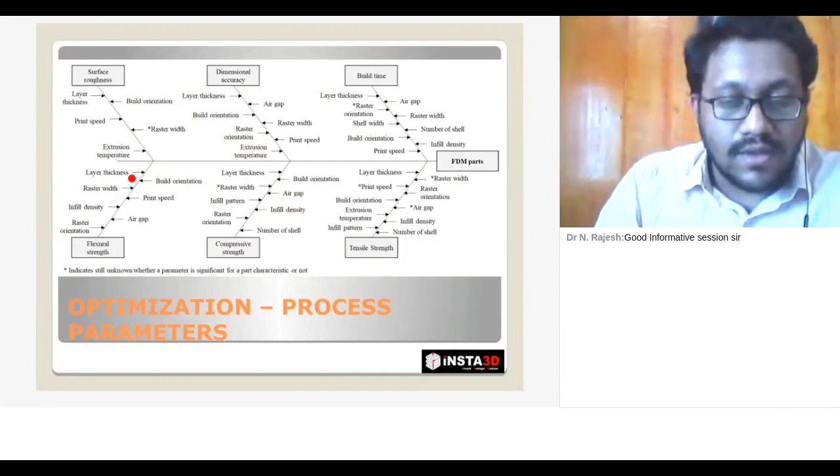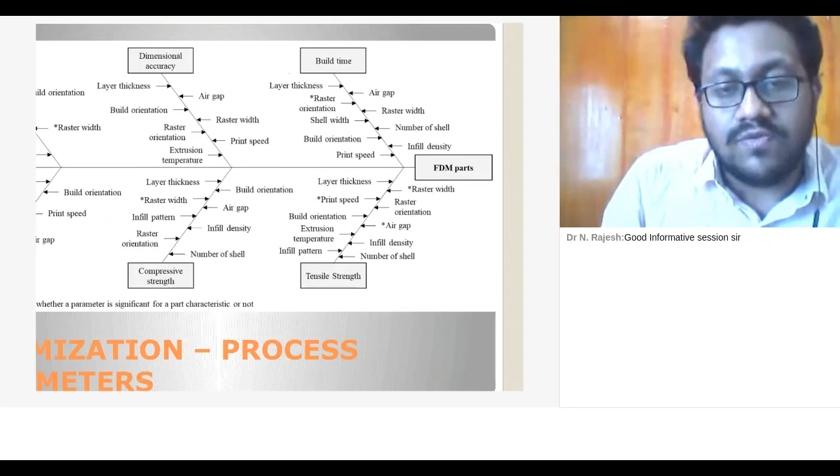So this is the fishbone diagram showing the different process parameters available. If you are opting for research, you can just follow the fishbone diagram which is depicted here. It's taken from this research paper. So in order to analyze the tensile strength, you can vary these things so that you can get the comparison of the tensile strength between different materials. So this is something which will be very helpful for researchers doing research in 3D printing technology.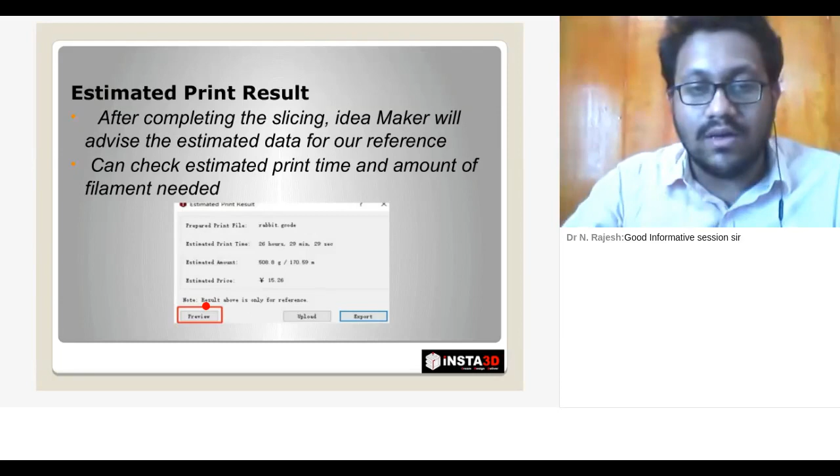So the next thing is, you have inputted all the process parameters. Just click on the slice button. The product is getting sliced, and then the output can be taken out of the slicing software. You can export the G-code out of the slicing software. You can also preview the number of layers, and you can just simulate the component so that you can find if there are some errors in the component.

So this is how a preview looks like. It also depicts the filament amount used, or you can also estimate the weight and the length of filament used. Everything is shown in the slicing software itself. The time taken is also shown in the slicing software.

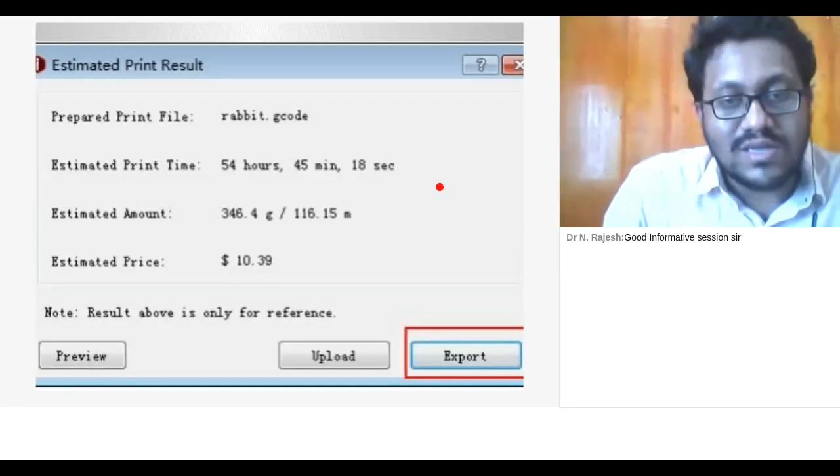As you can see, it tells us the G-code which we have sliced, and the estimated print time is also depicted here, and the amount of material used and the estimated price as per the information given by us can be seen here in the window. So this is a presentation of a G-code file exported out of the slicing software. This G-code file is input into the 3D printer so as to start the manufacturing process.

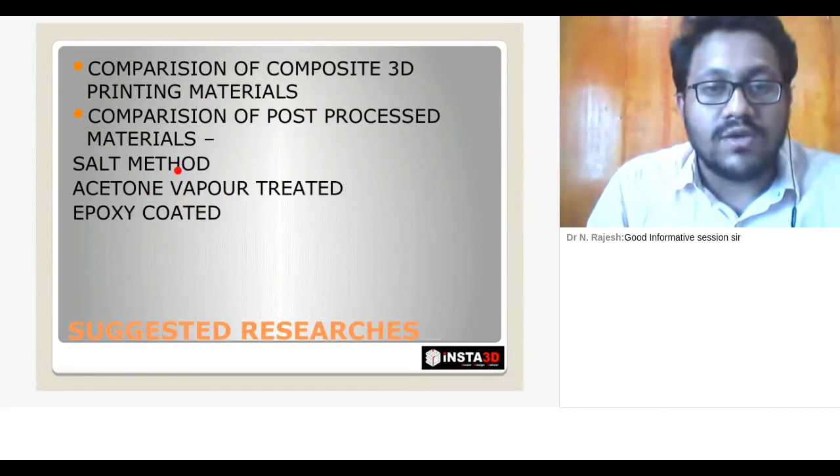So I'll suggest a few research ideas which will be a good input to the session. You can compare different composite 3D printing materials. Different filaments can be processed, and they can be compared based on the application which you are using. You can also compare post-processed materials. There is something called the salt method, acetone vapor treated, or epoxy coated method, where you can compare using these post-processing methods.

So I'll share my screen and show you the representation of the IdeaMaker software. Hope it's visible to you. So this is how IdeaMaker software looks like. You can just start with import models. I'll go with a tensile specimen. This is how a tensile specimen looks like. You can pan it, right click, and you can rotate using the mouse to view it in all directions.

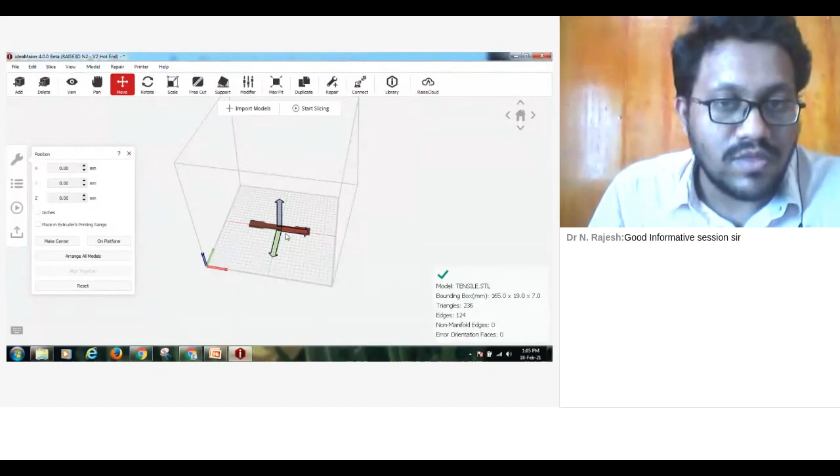You can just click on the home button to return to the home position. You can move the component on the build platform. You can click on 'on platform' to place the component onto the platform. You can use 'make center' to move the product into the center. And if you have multiple models, just use Control C and Control V for copy pasting. And press Control A to select all.

You can just click on 'arrange all models' so that it will automatically arrange the specimens as per the IdeaMaker algorithm. So we are going to just slice a single component.

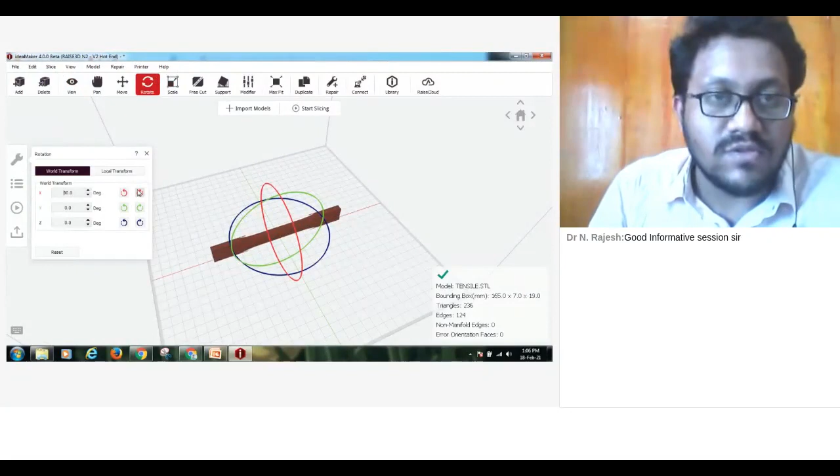So you can also scale and rotate the build. You can change the build orientation using the rotate command. See, using the arrow marks available here, you can just transform or rotate the component in the preferred build orientation. This is the on-edge build orientation. This is the flat orientation, and this is the upright type build orientation.

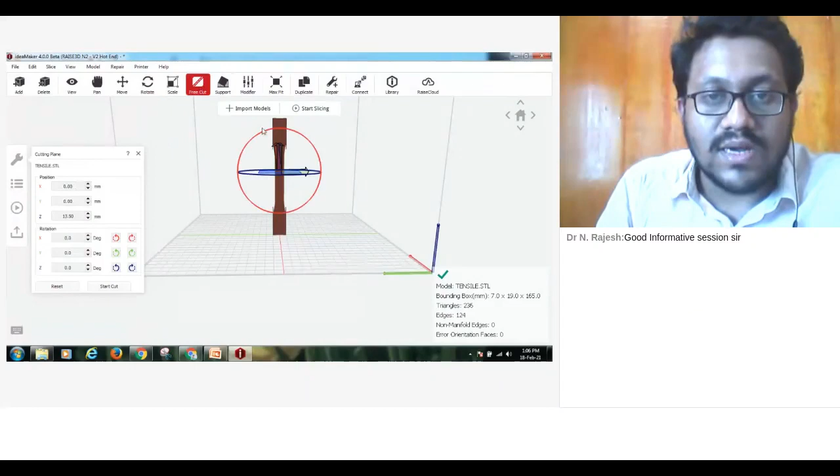If you need to scale the 3D printed component, you can change the percentage scale here. You can also cut the specimen into two parts using the cutting plane in the free cut option. You can move and you can change the values of Z as well in the cutting plane.

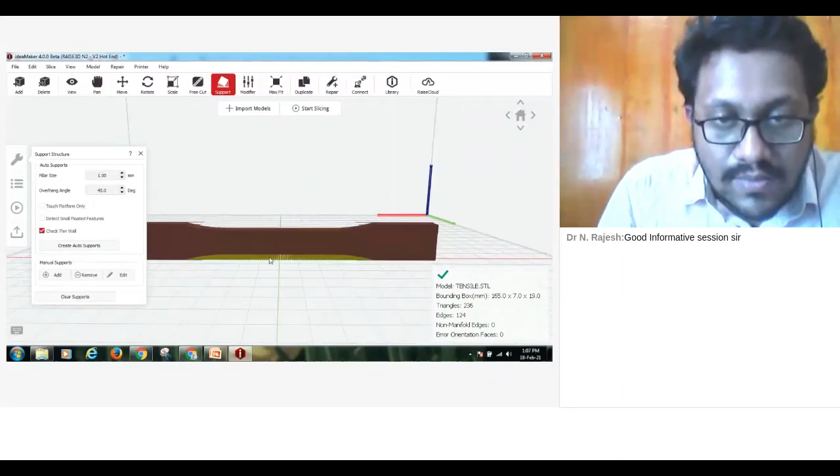So you can also add support structures to the model. Since the overhang angle is high, we can reduce it. So sorry. So when putting a 45-degree angle support structure, we will just put the overhang angle as 45 degrees and the pillar size as 1 mm. Just click on create auto supports. You can see supports generated below the 3D printing component.

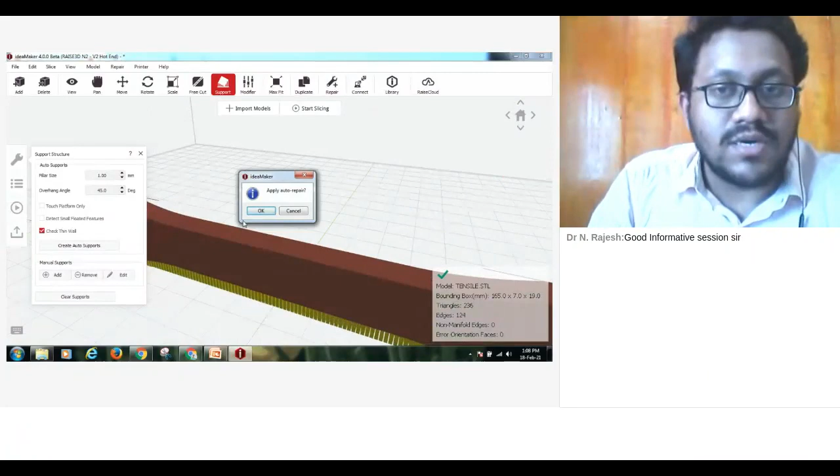And in some cases, this area will have a yellow exclamation mark, which means the mesh is not intact. In that case, you can just click on the repair option and click on auto repair so that it turns to green. Only then the 3D printing design is perfect. So these are the basic tools available in the toolbar.

And let's see how we are going to slice. Click on start slicing. You can edit the options by double clicking it. You can see different tabs available. You can change the layer height of the component. First layer height can be varied, shells can be varied, shell overlap percentage can be varied, and there are a lot of other options as well, which are not required for now.

You can change the infill percentage. I will give it as 25%. The infill overlap is 15%. And the infill pattern type, I will give it as honeycomb structure. Then the top and bottom layers can be changed. I will give it as 5 bottom layers and 3 top layers.

And then support material parameters can also be varied under the support tab. For platform additions, you can just give raft with skirt to the component. Since it has a reduced cross section, it has a high possibility of getting toppled off the 3D printing platform. So I'm giving raft with skirt as the platform addition, and the surface area is also very high, so warping can happen. So I will be giving raft with skirt.

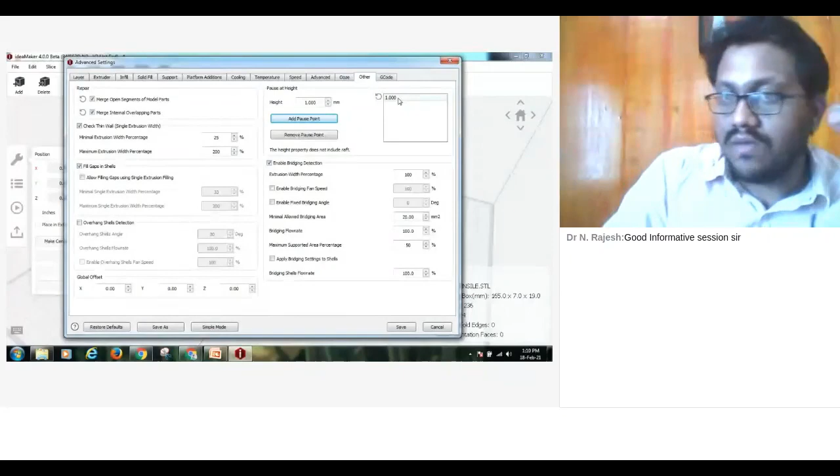If we need to change the color in the middle of the print, you just need to add a pause point in the 3D print. So if I'm giving 1 mm as the pause point, the height is given as 1, add pause point. After reaching 1 mm, the printer pauses and the head moves out of the way, and you can change the raw material to another color. So 2 different colors can be obtained using the pause option. You can click and remove the same pause point as well. You can just save it and slice.

You can see the windows, where you can view the product's name, G code, and the estimated print time is around 1 hour 16 minutes 48 seconds. The estimated amount of material used is around 17 grams, 5.59 meters. And let's see the preview simulation of the 3D printed component. This is how the 3D printed part looks.

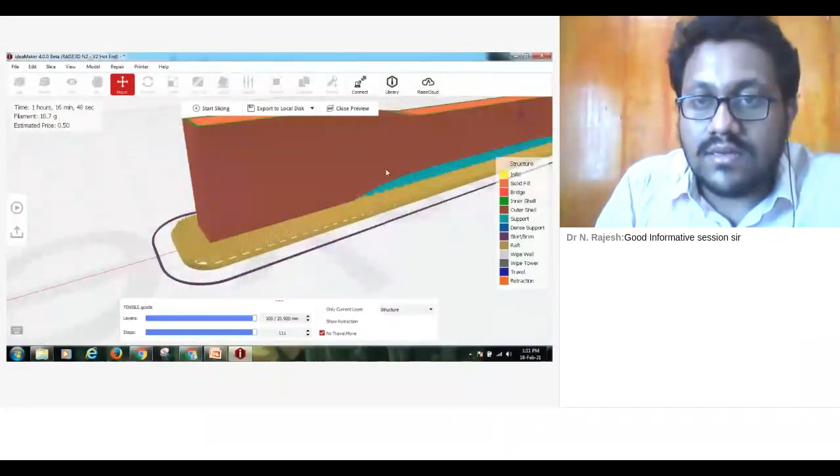So I'll just zoom in. This purple one is the skirt, the yellow one is the raft. This is the build part which is printed, and the blue one is the support structures. As you see, there are different layers visible. You can use this tab to view the inside of the model.

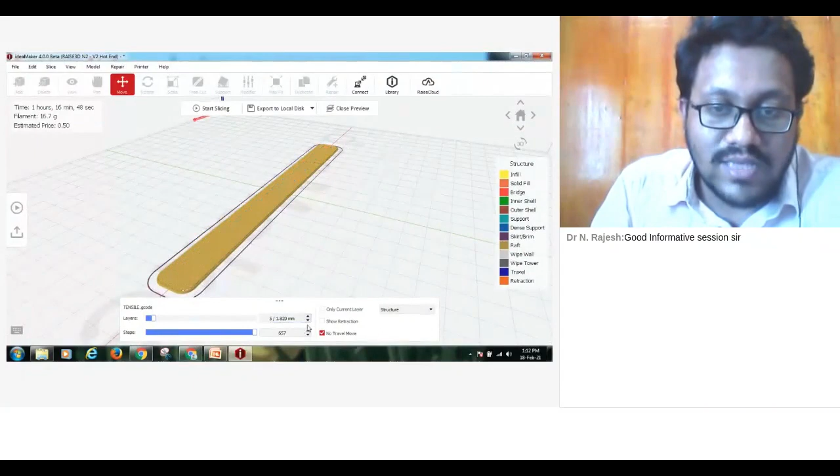As I said, I have given 5 layers in the bottom. I'll show you how the 5 bottom layers happen. First layer, second, third, fourth, fifth, and then the infill starts. It gets 3D printed, and at the top, there are 3 top layers. Once it reaches the top, 1, 2, 3. There are 3 top layers visible.

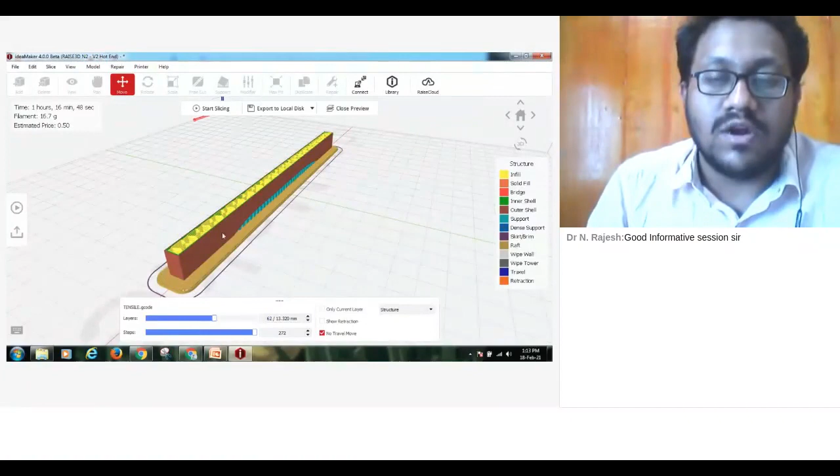So the whole 3D printed part is printed at 25%, which is a good infill ratio. By increasing the infill ratio, the amount of material used inside, the time will vary accordingly, and the weight of the product will also vary according to the infill used. So this is the demonstration of the IdeaMaker software.